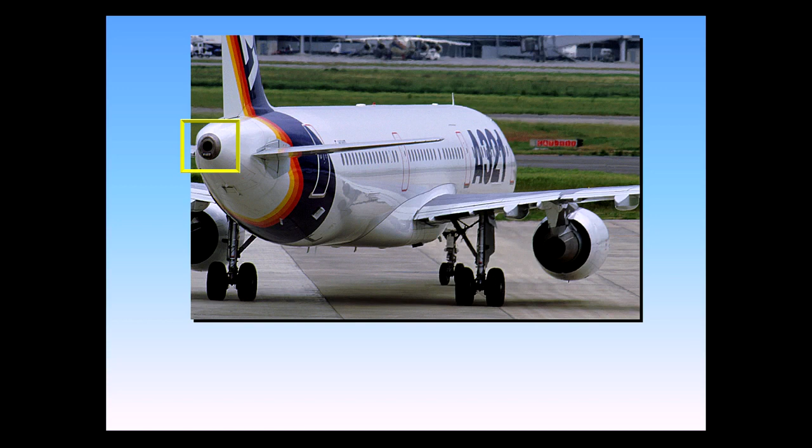During the walk-around inspection, you must check that the APU exhaust is clear and verify that the APU fire extinguisher overpressure red disc is in place. For more details on this red disc, refer to the Fire chapter.

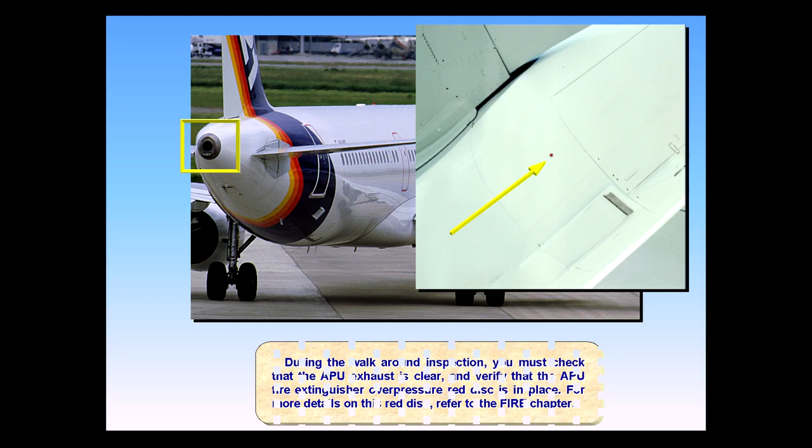You are in the initial cockpit preparation phase. In this example, external power is connected. Let's start the APU. First, select the APU master push button and switch it on.

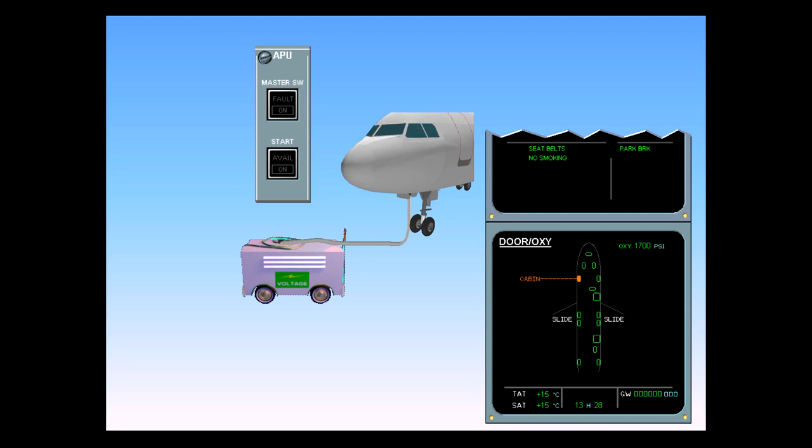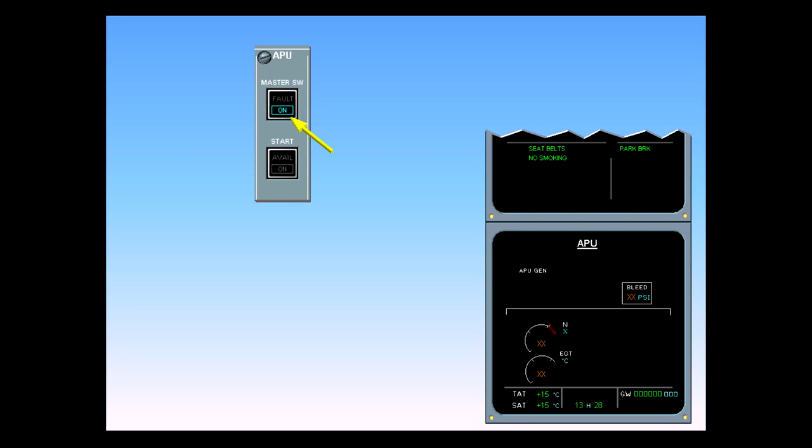Observe that the on light illuminates, the ECAM APU page is automatically displayed, and the green flap open indication appears when the APU air inlet flap is fully open.

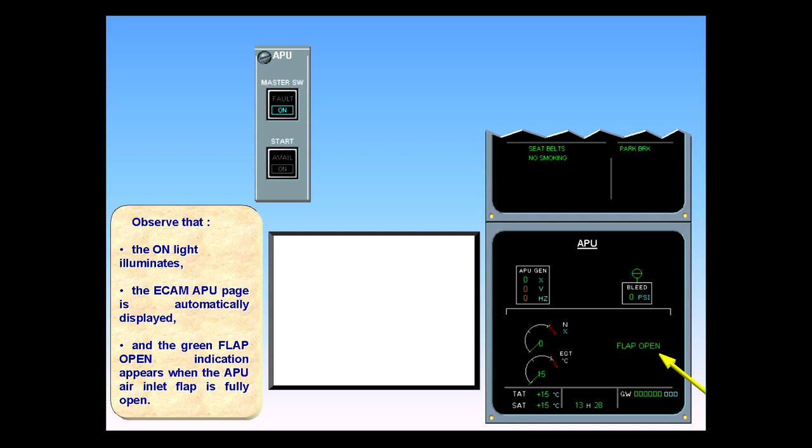It is not necessary to wait for the flap open indication before pressing the start button. However, the APU will not start until the flap is fully open. Now, select the APU start switch to initiate the start sequence.

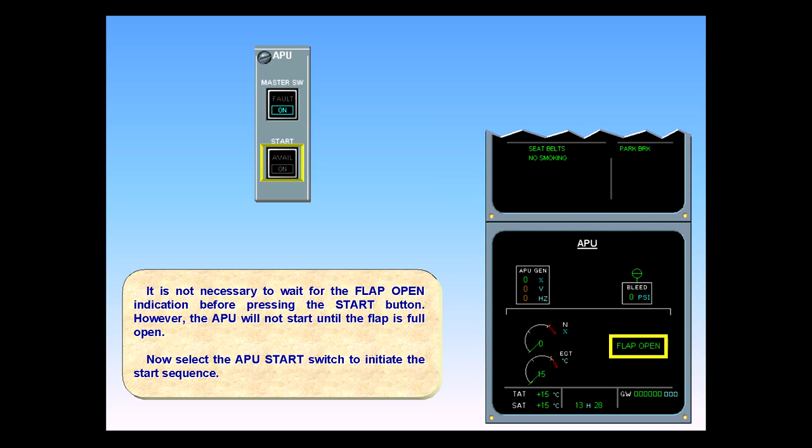The on light illuminates blue in the start push button switch to indicate that the automatic start sequence has begun.

At approximately 95% N speed, the on light on the start push button switch extinguishes, and the avail light illuminates green, indicating that the APU parameters are normal and the APU is available to supply electrical power and bleed air.

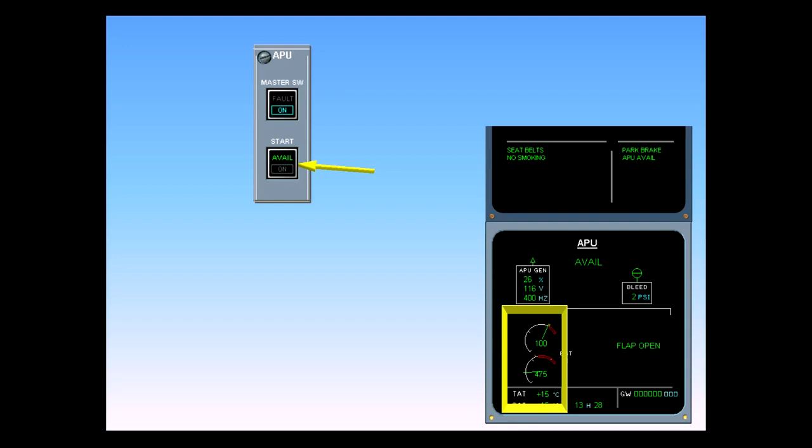At the same time, the available indication appears in green on the ECAM APU page, and the APU available memo is displayed on the engine warning display.

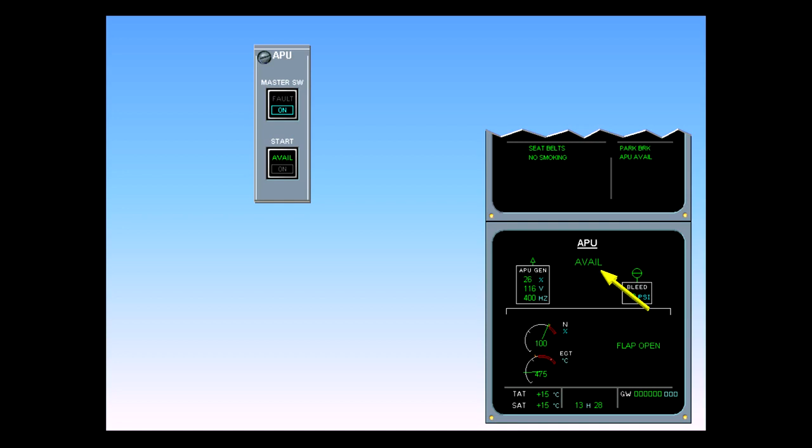About 10 seconds later, the ECAM APU page is replaced by the ECAM door page.

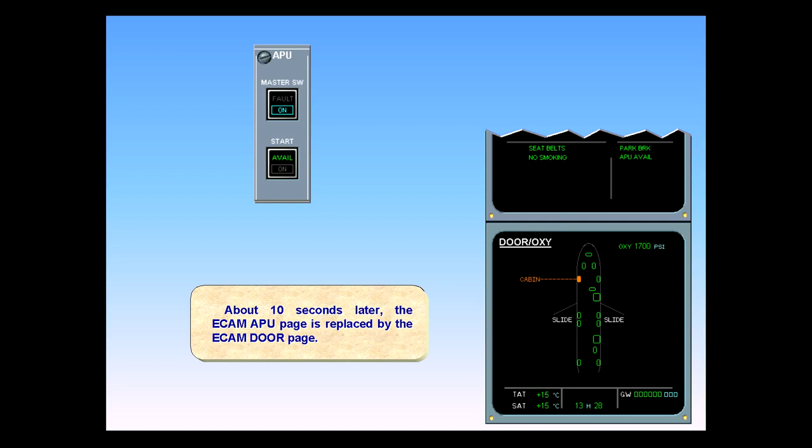For training purposes, the ECAM APU page has been recalled, and the air conditioning panel is also displayed. For the APU to provide bleed air, the APU bleed switch must be turned on. Switch on the APU bleed air and observe the following indications.

The blue on light appears in the APU bleed push button switch. The APU bleed valve opens with bleed air pressure available, and the green APU bleed memo replaces the APU available memo on the engine warning display.

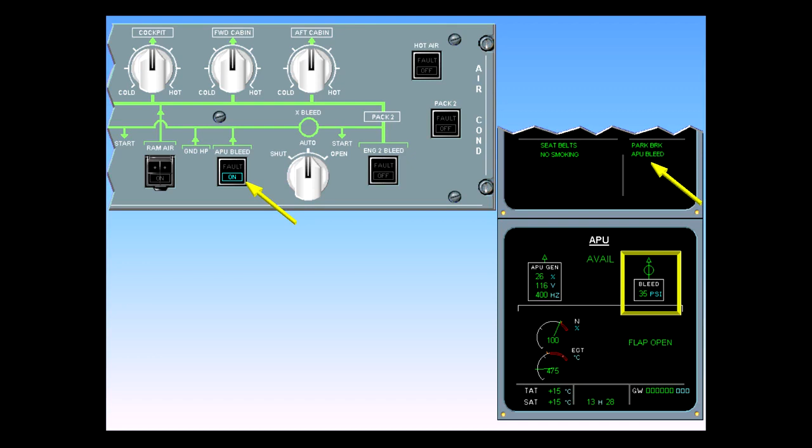Once the engines are running, the APU is no longer required. To shut down the APU, first switch off the APU bleed.

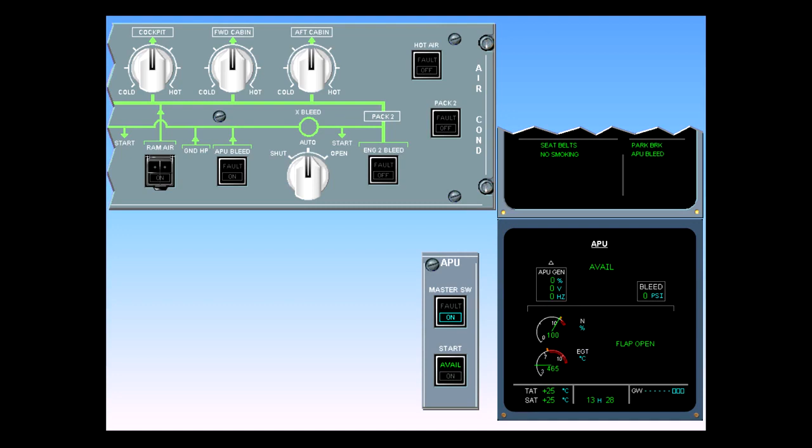When the bleed valve is closed, the APU bleed memo on the engine warning display disappears and is replaced by the APU available memo.

Also, the bleed valve indication on the APU ECAM page goes to the closed position, and the bleed pressure indication drops to 0.

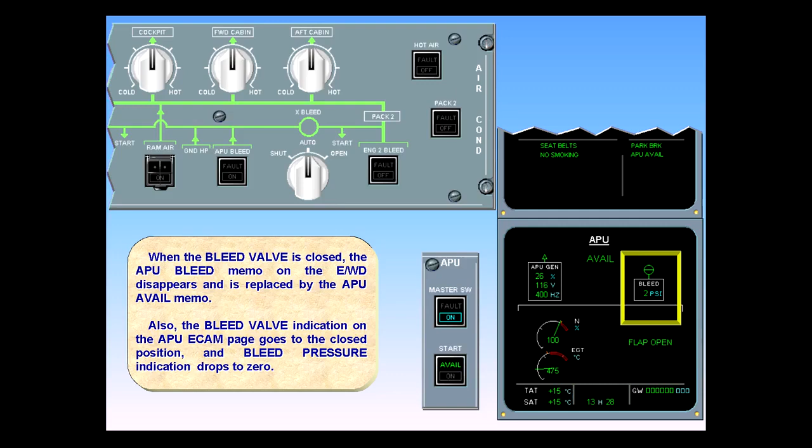Now, select the APU master switch to off. The automatic shutdown cycle has been initiated. Note that the blue on light in the master switch has extinguished.

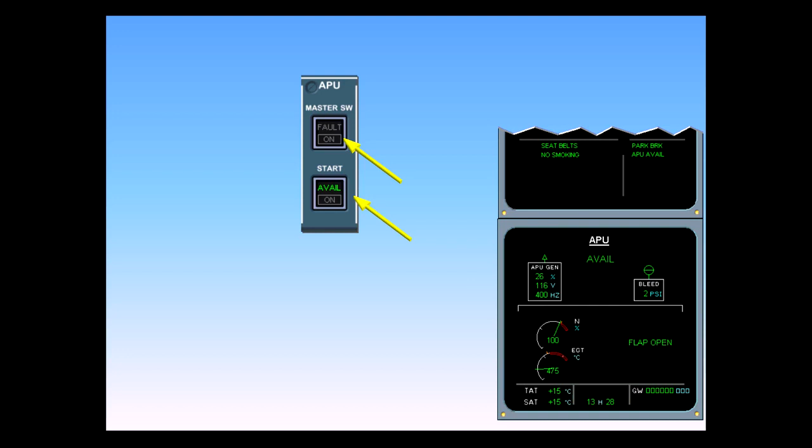However, because the APU bleed was used, the APU will continue to run for a 2-minute cool-down period, and the APU available indications will remain during this time. If the APU bleed has not been used, the APU will shut down immediately.

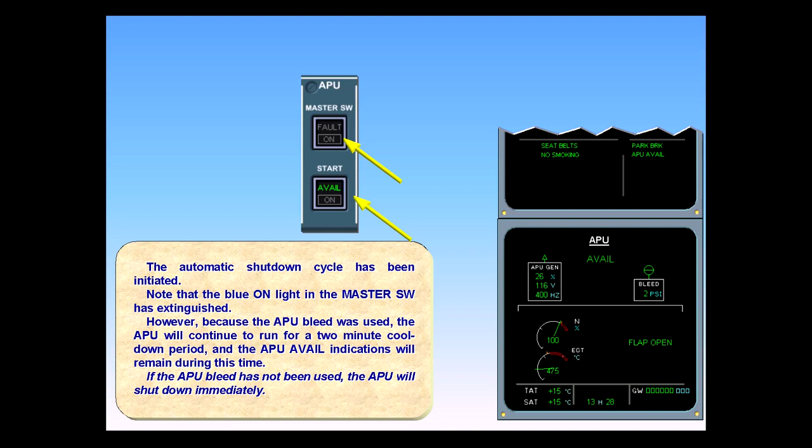If needed, the shutdown cycle can be stopped by pressing the APU master switch back to on, provided the avail memo is still displayed.

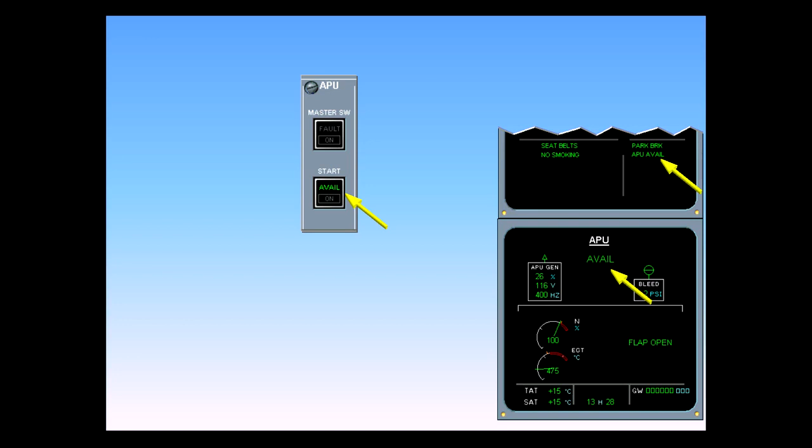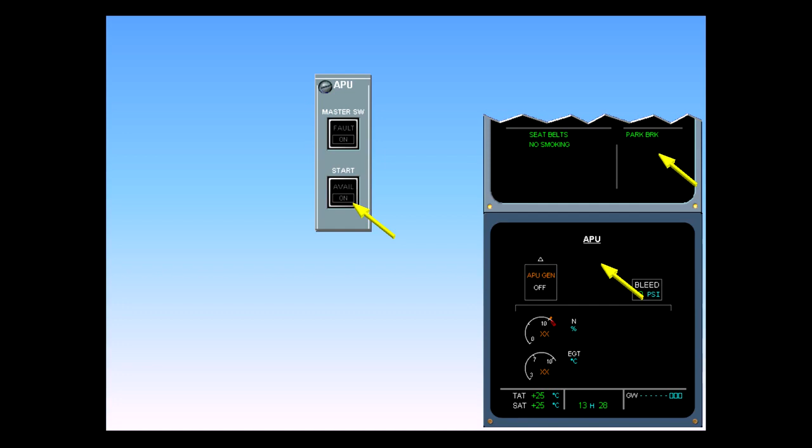When the cool-down period is complete, the APU shuts down and avail disappears. The air inlet flap closes and the flap open indication disappears from the ECAM APU page.